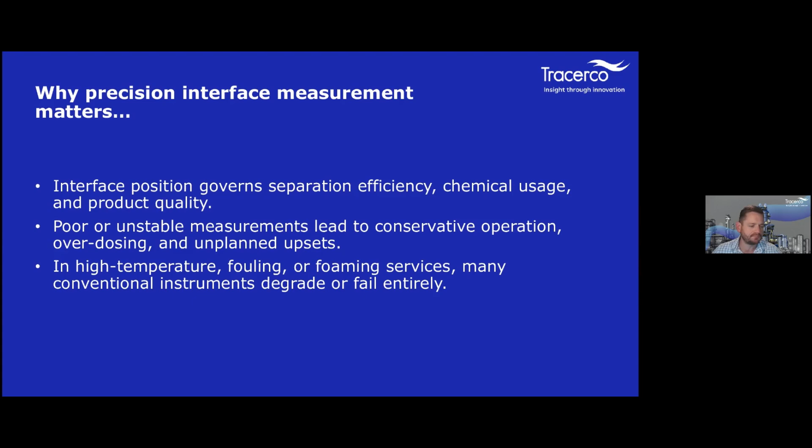As you're all aware, precision interface measurement improves product quality, leads to less unplanned upsets, and reduces the failures in your facility. Going to go ahead and give an overview of the agenda that we're going to be covering today. First of all, why interface measurement fails in refinery service. We are going to go over the existing technology landscape and go over the strengths and limitations of some of the different technologies. And then we're going to discuss neutron backscatter. First is the technology, then give some examples of how we currently use neutron backscatter. And then we're going to introduce our new product called Drum Vision.

After this, we're going to go over a couple of applications in refining, specifically delayed coking and distillation, and how Drum Vision can be used in those applications. We're also going to cover the operational benefits, safety, and economic impact. And then we will have some Q&A.

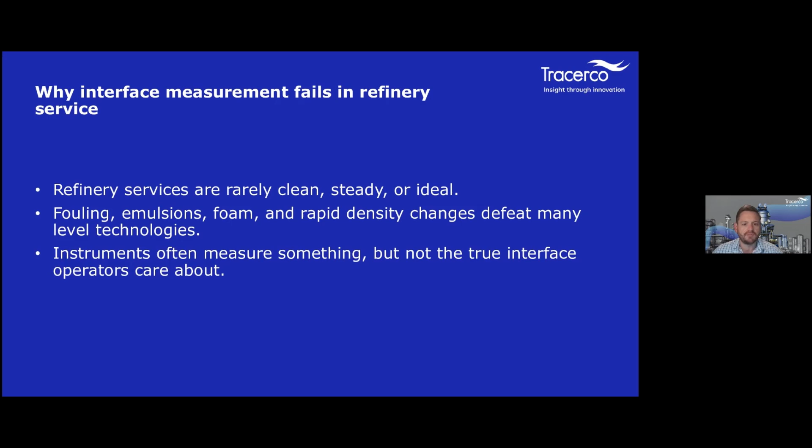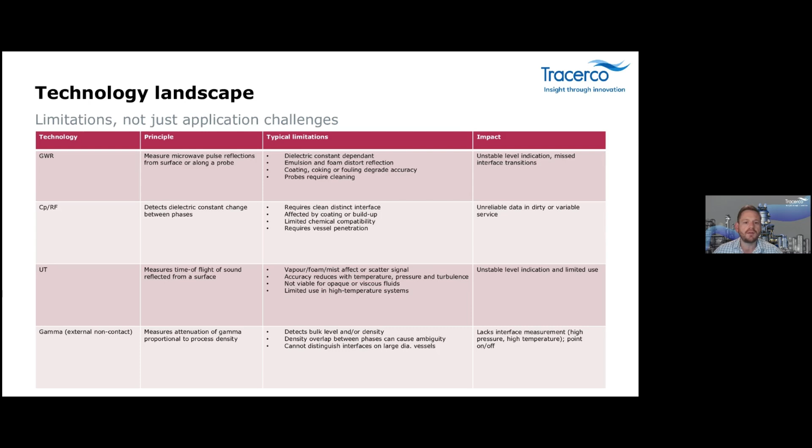Gamma is another one. Gamma at the bottom of your screen there is a great technology. Tracerco uses this technology in both our instruments and in our services, but it does also come with some limitations. Primarily that externally mounted gamma cannot distinguish interfaces on large diameter vessels and works more like a point on-off switch in many applications. Each of these technologies relies on a physical property that's unstable in an operational refining environment. Neutron backscatter changes this by measuring hydrogen content through the vessel wall, providing a stable, non-contact, real-time interface measurement.

Speaking of neutron backscatter, I'm going to invite Bailey back on the screen to go over the fundamentals of this technology. Thanks, Logan.

So I'm going to talk about the fundamentals of neutron backscatter. Neutron backscatter is a non-intrusive method of enabling the user to see behind the vessel wall and identify process materials. What we do is we use a neutron source which is based next to a detector external to the vessel wall. This neutron source emits fast neutrons. These fast neutrons are hard to detect and don't interact with many materials. They interact with materials such as hydrogen due to neutrons having the same mass as hydrogen. So therefore, materials are actually distinguished by the level of hydrogen they've got in them. For example, water will be easily distinguished against air because water has a lot more hydrogen than air does.

So once these neutrons interact with the hydrogen atoms, the fast neutrons slow down and become what we call thermal neutrons. We call them thermal neutrons because they're in thermal equilibrium with the materials and the phases around them. And once they do interact with the hydrogen and the materials, these neutrons actually scatter. And in some cases, they scatter backwards. With materials with high hydrogen concentration, we expect to see a lot more neutrons scattered back than we would in materials with low hydrogen concentrations.

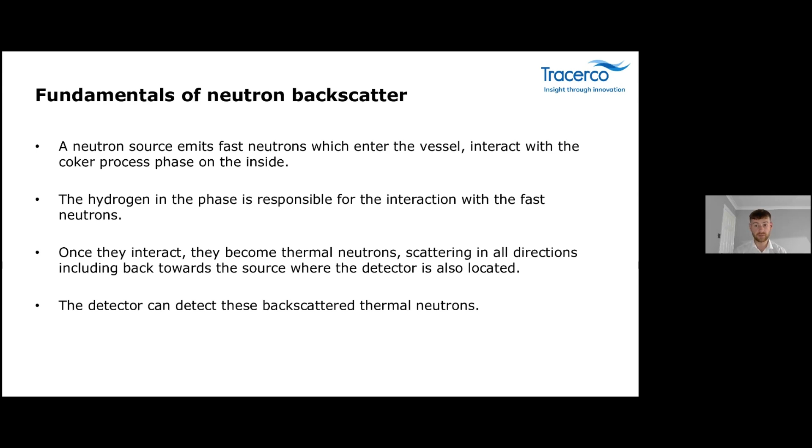These neutrons don't actually get too far into the vessel, so they go about 200 to 300 millimeters into the vessel. This device is a fixed gauge that's external to the coker or any other vessel that we're interested in seeing, and is actually placed quite close to the drum. So these neutrons are emitted in and come back out, and that's how we can distinguish between the phases. I'll hand back over to Logan now, and he'll talk about the current neutron backscatter usage.

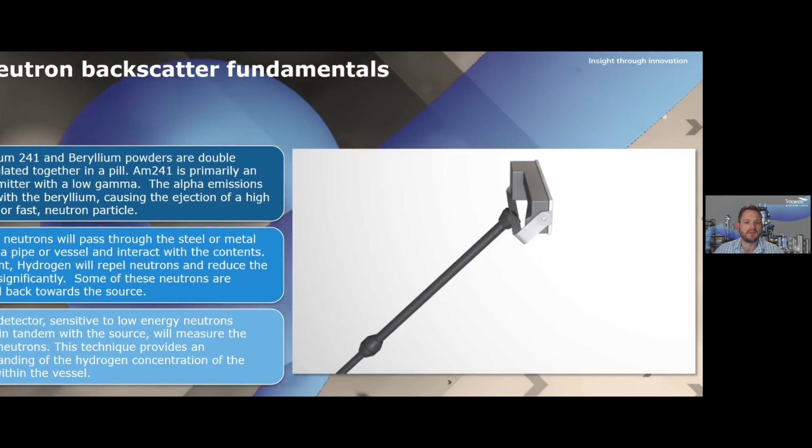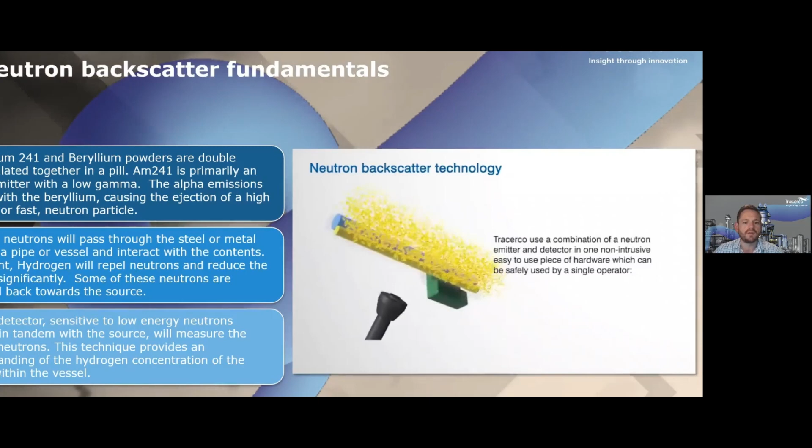Yeah, thanks, Bailey. So we wanted to give a quick background on what neutron backscatter is, and now we're going to show you how we currently use the technology, or historically use the technology at Tracerco. We currently use neutron backscatter in many of our services that are provided by our process diagnostics team. We have a little video that we're going to play for you here that's an animation. So in this case, we have a neutron head on the end of a telescoping pole. In the head is a high-energy neutron emitting source in tandem with a low-energy neutron detector.

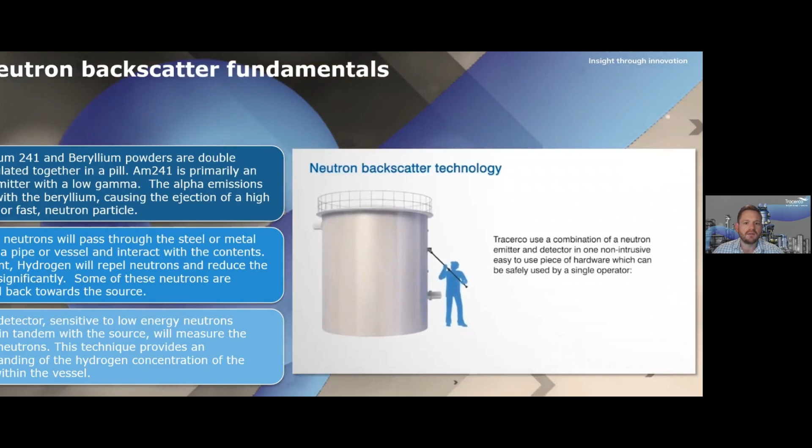When we take this head and we place it on the side of a vessel, on an atomic level, steel and other materials are a relatively empty space, giving little to no resistance for the neutrons to pass through. Upon contacting hydrogenous material, the high-energy neutrons will lose energy and be repelled back to the low-energy detector, thus defining the term neutron backscatter. As the neutrons come in contact with more hydrogen within the vessel, they lose energy and will be sent back to the detector in higher numbers. The difference in the reading of hydrogen content allows us to tell with certainty where the different interfaces are within the vessel.

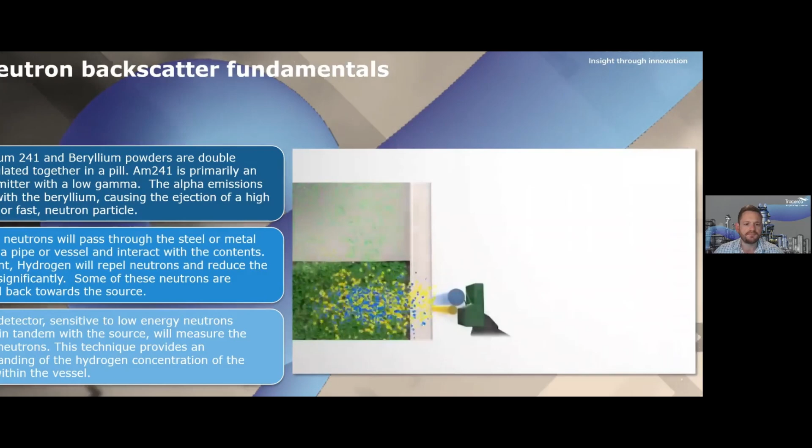So here we have a brief illustration of how neutron backscatter can be used on a storage tank. In this case, you can see we've identified a clear vapor at the top, a bulk oil level, an emulsion layer, water, and a solids deposit in the bottom of the tank. Based on the hydrogen content of each material in the vessel, we're able to identify different phases of material and at exactly what level they occur.

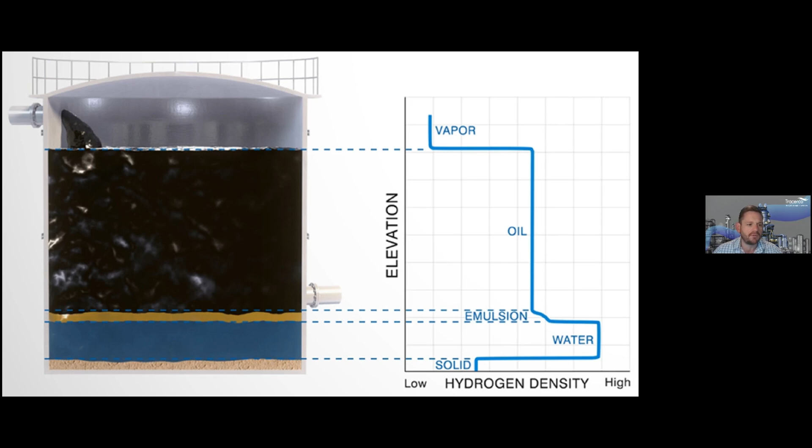So we covered neutron backscatter as a technology, talked a little bit about some of the uses of neutron backscatter, and now Bailey's going to introduce Drum Vision, which is a new product that we have launched here at Tracerco. Thanks, Logan. So Tracerco, as Logan just said, have created a product using neutron backscatter, and this enables us to visualize what's behind a vessel wall.

So what we're looking to do is maximize process profitability. We're looking at optimizing yields, reducing waste, and increasing throughput. We do this by enabling high heater temperatures and low drum pressures. So the Tracerco Drum Vision supports more aggressive, profitable operating conditions. It allows for better feedstock blending and improves the coke quality as well.

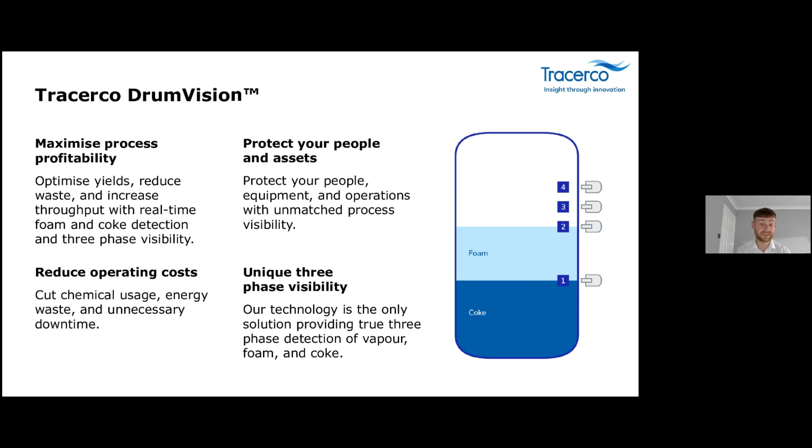Next, we look at protecting your people and assets. So the Tracerco Drum Vision product offers real-time foam and phase detection, helping avoid foam overs, costly upsets, and unplanned downtime. As you can see on the right-hand side, we've got a representation of a coker, and there's 4 points labelled on there, which would be the Drum Vision product. So at different points, we can visualise different phases of process materials behind the wall. And one of the key ones that we're interested in is the foam.

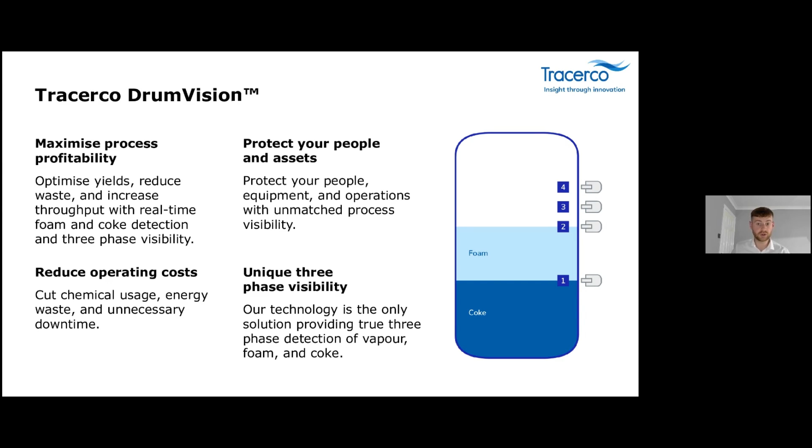So this then leads us on to reducing the operating costs. As we're able to give a good informative idea of where the foam is in the vessel, it allows the user to cut chemical usage with anti-foaming agents. It means there's less energy waste and there's less unnecessary downtime. And finally, we look at 3-phase visibility. So as mentioned, we're trying to identify different phases. We're able to identify differences between water, vapors, coke, foams, things like that.

So next, we want to see the product. So this is Tracerco Drum Vision. On the right-hand side, you see the front face. That face will be flat against the coker wall or any other vessel that you intend to use it on. That essentially would be pretty close to the wall and at high temperature. In the middle, you can see the rear of the Tracerco Drum Vision product. What we've got is the Tracerco swish on there, which allows you to understand that it's a Tracerco product. And then the 2 cylinders at the back there are the detectors.

To break this down, we look at the image on the left-hand side. So part 1, we've got the face, the part of the Drum Vision product that actually goes to the face of the drum. This houses the source and the detectors. It enables them to be optimized at certain distances from each other, and it allows for a bit of shielding from gamma at the front there.

Secondly, we've got some neutron shielding. So at the front and foremost of it all, we do care about safety. Obviously, working with radiation sources, we're wanting the dose rates to be reduced so we can work with them efficiently and safely.

So this part on point 2 is actually shielding for neutrons, which reduces the dose rate efficiently to a point where it's not going to affect workers around it, and work can be done quite easily around it. This also has an extra benefit to it. So unlike legacy systems where calibration is required quite frequently, this means that our product is constantly calibrated. We can actually track the neutrons and make sure that we're detecting them, and there's no need for further calibration.

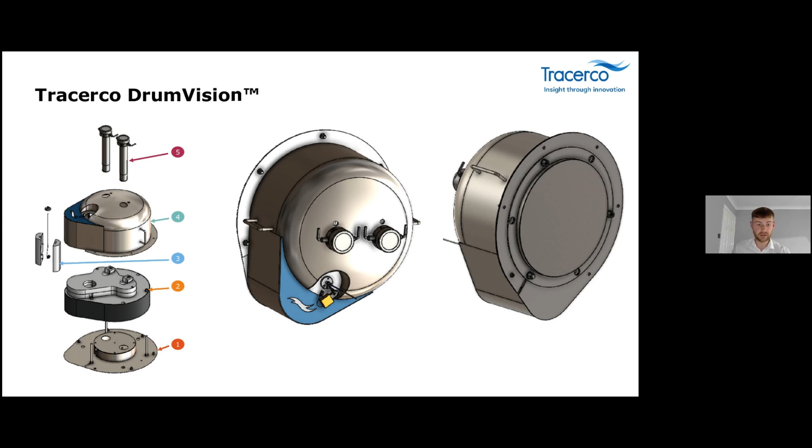I've showed you the nice photos, but let's look at some data to show it actually works. So we've actually worked with a site in Europe. We've connected to the 4 to 20 milliamp system with our detectors, and we've been able to collect some data. This is just one cycle that we've got on the screen here. So the first 3 circles are labeled anti-foam injection. We've seen foam rise to a point, and it's enabled the user to actually put anti-foam into the coker without wasting the anti-foam agent. And this can save time, save money, and make the process last as long as we can and optimize it so we can get the best output.

Secondly, we can see the cooling water in the box. Essentially, the coker's been cooled down. We've been able to detect the cooling water that's gone in there, and that's clearly different to the foam and anti-foam areas as seen previously. Finally, we look at our 2 little peaks at the end, which are labelled water jetting coke out. So as the water jets hit the part where we're detecting, you can see the spikes in the data. So this shows that the Drum Vision product is quite reliable and it picks things up quite quickly.

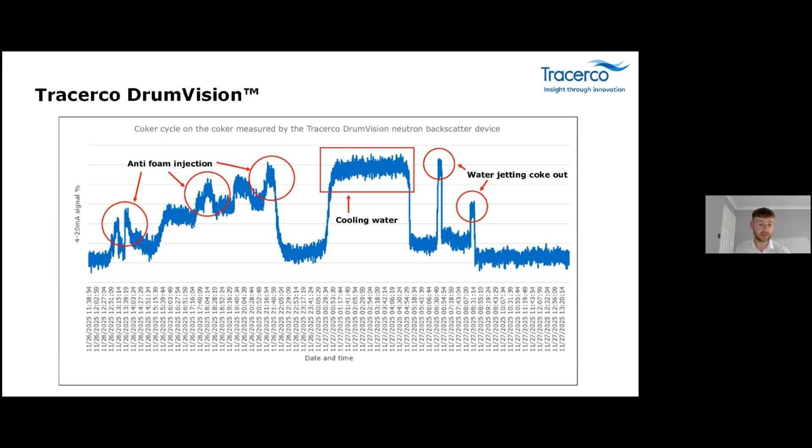So just to summarise that up, Drum Vision is actually a non-contact product. There's no intrusion. It means there's no changes externally to the vessel where legacy systems have been placed. No fouling or corrosion exposure. Secondly, we're looking at hydrogen-based measurements rather than density. So we're not looking from one side of the vessel to the other, especially in the case where cokers can be up to 10 metres in diameter. What we're doing is looking 20 to 30 centimetres inside of the vessel, and we're seeing data from that.

It's immune to dielectric and composition variation as well, and we can actually look at phases where there is a bit of an emulsion. That leads to the next point, unaffected by emulsion or foam. So we can accurately identify foam and emulsion phases quite clearly by the number of neutrons that we're seeing backscattered. These neutrons being different numbers at different points mean that we can follow it, and with the time that it takes to actually identify that, we can see a clear line of where changes occur. It's also stable under process changes, so there's no recalibration needed.

Essentially what we do is the coker is fitted with the Drum Vision product, and in cases where legacy systems have been placed before, it's a retrofit and it can fit on quite easily. It's just a plug and play of the old unit. These units are calibrated to the hydrocarbon vapor and to water, so there will be a max and minimum at that point. And then from this, there's no need for further recalibration after that.

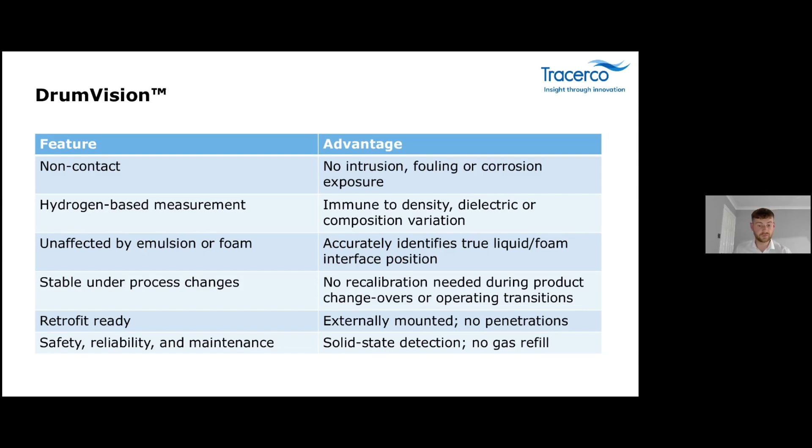I'll hand back over to Logan now to talk about applications in refining. Yeah, thanks, Bailey. So we wanted to cover how Drum Vision can be used in a couple of specific refinery applications, delayed coking and distillation. So go ahead and get started with that. So we'll start off with delayed coking.

So the challenge in delayed coking is that foaming in coke drums can cause an overuse of anti-foam. We all know that chemicals are not cheap. And it also poses a risk of carryover that can damage downstream equipment and downstream instrumentation. The limitations of traditional coke drum instruments are essentially that there is no reliable real-time measurement of the foam interface.

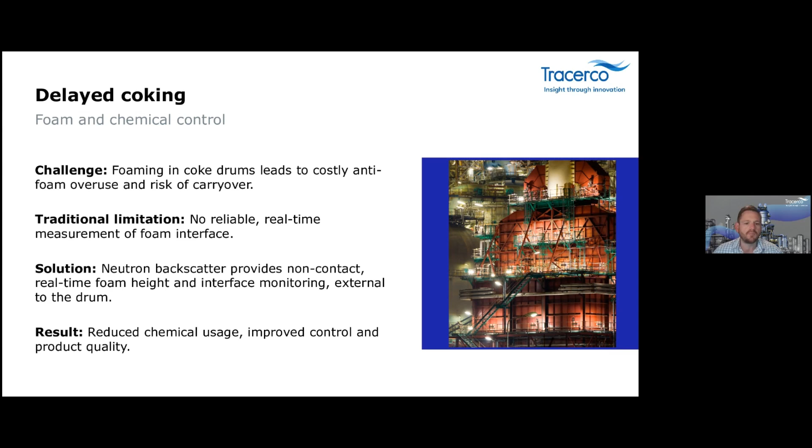So Drum Vision, using neutron backscatter technology, provides non-contact, real-time foam height and interface monitoring. Interface monitoring is a key here. Most traditional instruments that you're going to use here are level instruments based on density. If you look at hydrogen content versus density, you can see the actual interface. So the result of using Drum Vision here is reduced chemical usage, improved control, and better product quality.

So how does Drum Vision solve this? We talked a bit already about how Drum Vision detects the difference in hydrogen intensity between the liquid, foam, and vapor in a coke drum. This leads to an early warning of foam approach, which allows operators to see exactly where the foam is in the vessel before it reaches the maximum levels, which allows for smart and timely anti-foam injection.

The output of Drum Vision is quantitative feedback that allows operators to track foam collapse and liquid recovery, which in turn allows them to optimize chemical dosing instead of using a fixed rate injection. Drum Vision data allows operators to act proactively instead of reactively on their coke drums.

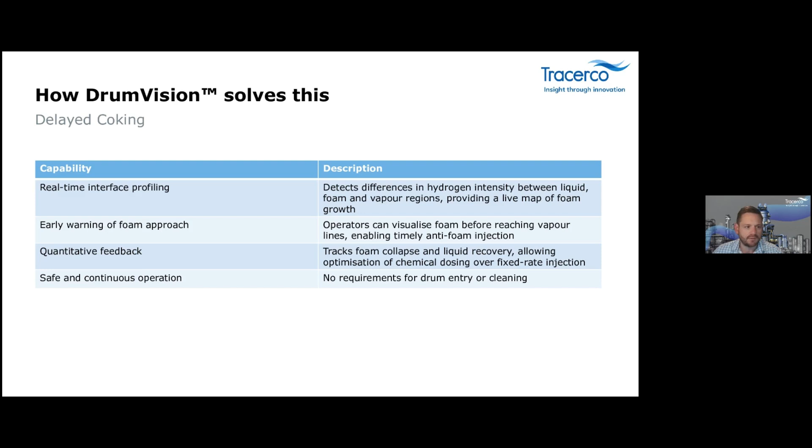So the benefits of using Drum Vision on delayed coking start with process control, specifically optimization of anti-foam and preventing foam over events. Chemical consumption can be drastically reduced by injecting it only when the foam is detected. On top of that, early detection limits product loss, foam carryover, and potential operational upsets.

The economic impact of just these two items can be incredibly significant in delayed coking operation simply by reducing chemical costs, avoiding an off-spec product, and of course, avoiding unplanned outages, which can be incredibly costly.

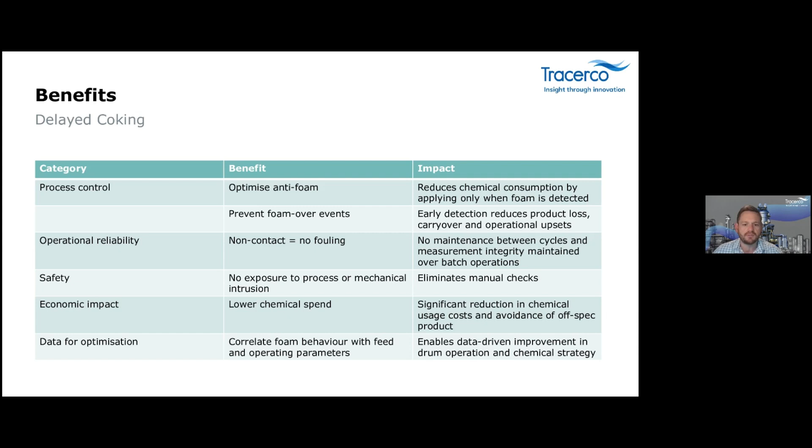I would like to point out that we do see gamma in a lot of coke drums. We understand that gamma is going nowhere. We use it and provide it ourselves, but Drum Vision is intended to overcome or complement some of these disadvantages and challenges of gamma-based measurement, especially in interface measurement of large diameter, thick-walled vessels.

Next, we're going to talk about distillation. So the challenge in distillation applications is that conventional level instruments struggle with emulsions and density changes in distillation systems. Traditional level instruments can drift or foul, which requires frequent recalibration and the risk of an off-spec product.

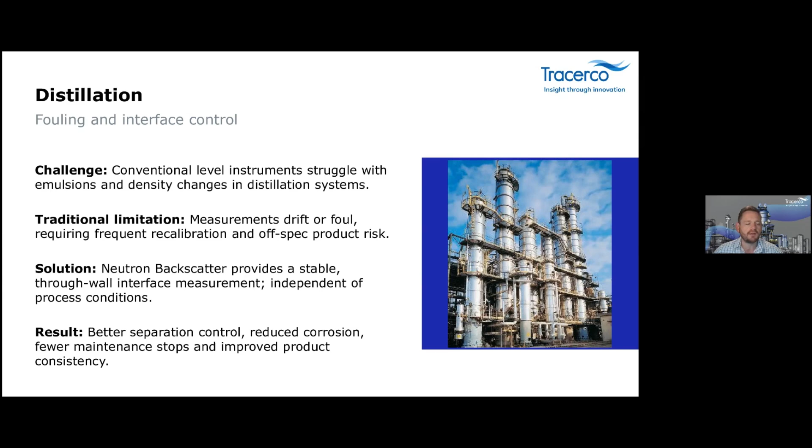Drum Vision and neutron backscatter provides a stable, externally mounted interface measurement that works independent of process conditions. Drum Vision is less affected by fouling than traditional instruments due to being a truly external, non-contact measurement, and due to the mechanism of measurement, which is hydrogen concentration. The result of using Drum Vision is better separation control, reduced corrosion, less planned and unplanned maintenance, and of course, improved product consistency.

So how does Drum Vision solve this? Well, first off, it's immune to density and dielectric changes. Again, Drum Vision measures hydrogen content, and the instrument is not affected by temperature or density changes, unlike other conventional instruments. Drum Vision gives a continuous, real-time response, which allows operators to understand and control the interface in a distillation column using real-time information. Also, as a side note, to install Drum Vision, there are no internal penetrations or major modifications required to put it onto the vessel.

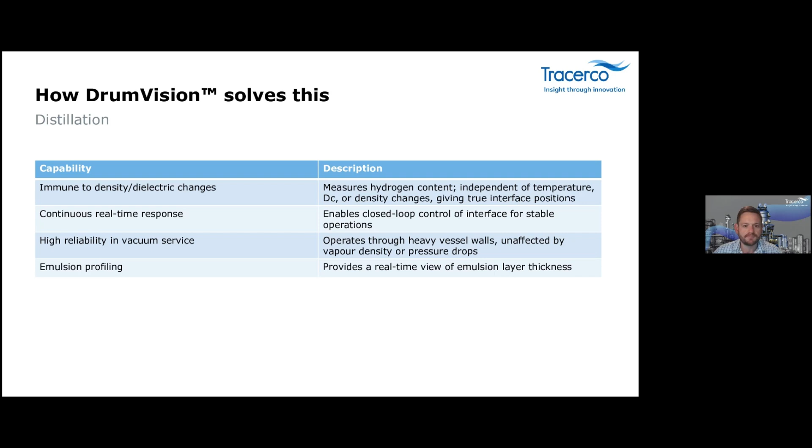Some of the primary benefits of using drum vision are listed here, including operational reliability. Using this technology will give you consistent readings even when your inputs change, which will reduce the need for manual intervention and calibration. It can also provide energy efficiency by reducing the demand on the reboiler. If levels are too high or too low due to conservative operation, the tower may experience entrainment or weeping, which forces the reboiler to work harder to maintain separation specifications.

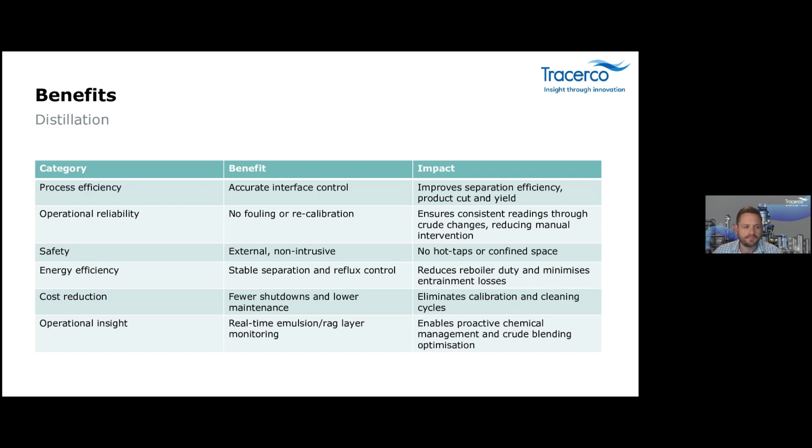Long-term, this leads to lower maintenance and shutdown costs, and as we mentioned previously, you've increased your operational insight and data in real time that can help you optimize your process. So why does precision interface measurement matter? It directly impacts your product quality, energy efficiency, and equipment integrity. Better measurements result in better yields, lower costs, and safer and more predictable operations. Regardless of your job title, unit, or facility, it's safe to make the assumption that every one of you in here shares these goals.

So with that, we're going to conclude the presentation on non-contact interface measurement in refining and the introduction of drum vision, which allows you to see more, control more, and save more. You cannot measure what you cannot see. And on that note, I'll invite Bailey and Neil back to the chat, and we will take some questions and provide some answers. Hey, thanks so much, Logan.

I'm going to step in as well. I'm going to just get rid of the slide here. We don't need to look at that forever. I'll put us up on camera, and let's start going through some of the questions that have come in. I saw Neil was answering some of those in the background while you guys were talking. I may pull out a few of those just so everybody can benefit from the answer there.

The first one I'm going to pick is how many units can be installed on a drum? And somebody just jump in and say, I'll take that. Yeah, I can take that. So typically, if we look at a coke drum type application, it would be anywhere between 3 and 4. The lower one would be situated around the bulk level of the coke to monitor the high level of the coke and the low level of the foam. And then the other 2 or 3 would be placed further up, like Bailey and Logan mentioned, to measure the foam approach and to optimize the anti-foam dosing regime.